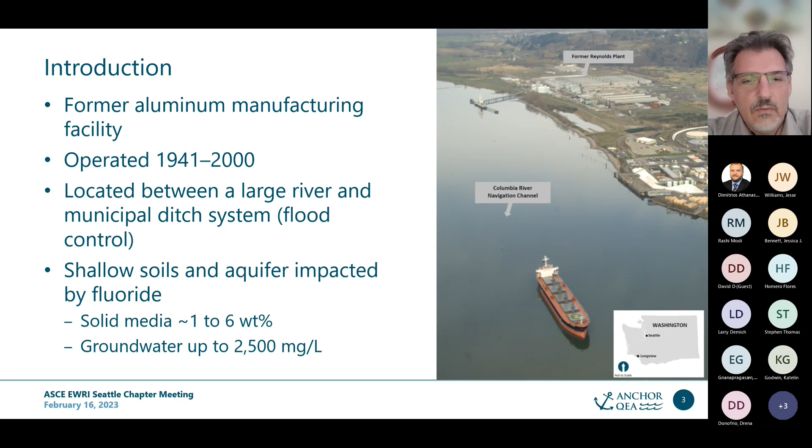Just for reference, the maximum contaminant level for drinking water, which is often what applies for groundwater cleanup, is 4 milligrams per liter. So that's a few orders of magnitude above that. How did the fluoride get there? I'll talk a little bit about the aluminum production process and why fluoride is such an important component of it.

One of the processes that was used more widely was called the Hall-Héroult process, which involves taking aluminum oxide concentrates from the ores and placing them in a carbon-lined pot along with a flux. This flux was typically cryolite, which is a sodium aluminum fluoride, and then applying current so that everything gets really hot and the aluminum oxide starts to melt. The flux reduces its melting temperature, which was really important to keep the process more energy efficient and cost efficient.

Because it's in contact with carbon, a reduced component, the aluminum oxide components actually become reduced to aluminum metal, and that's how they would make the molten aluminum metal. It would be poured off and shaped and so forth. The cryolite was a key component of the process.

Because cryolite is not really available naturally, it's not a widespread common mineral, it's relatively rare. One of the things they did was try to recover the spent cryolite from the actual pot liners, the carbon liners. They would crush up these carbon liners once they were no longer usable and try to leach out these fluoride salts and reprecipitate them so they could be reused. A lot of the process residuals, which still had some residual fluoride in them, were managed on site in landfills. So we have these sources of fluoride on site.

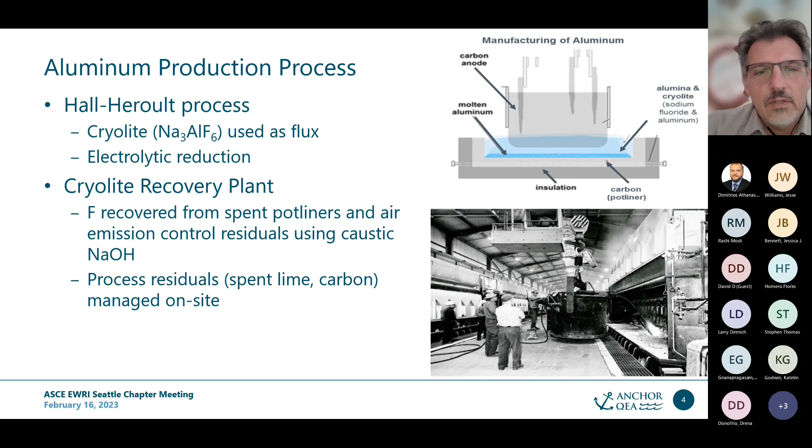Just to give you a picture of where the stuff ended up being located, you can see here... I don't know if, can you see my mouse on the screen? Yes, we can. Okay, perfect. So this is the part of the site.

So here's where all the facilities were and the lines, the pot lines, essentially. This area here in blue is where the cryolite recovery took place. And then these two landfills were where some of the residuals would be stored. There's some other places where, after 60 or so years of operation, you run out of space, you start looking for other places to put some of the stuff.

There are some materials here that also contained other residues and debris as well. And then from the early portion of the operation of the site, there was a RCRA facility. It was closed as a RCRA facility. This was a landfill from prior to cryolite recycling or recovery. And so this was material that probably contained higher concentrations, but it's not marked here because you can't sample this because it's essentially a closed landfill. But the soil surrounding it, you can see all green, means that they're below the screening levels for fluoride.

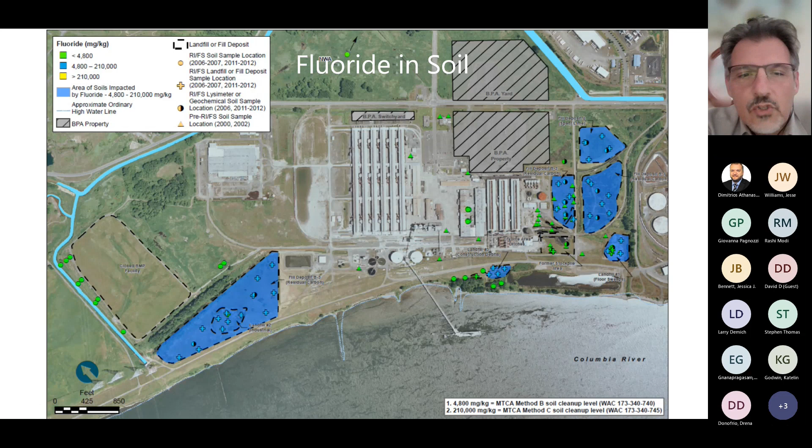So we identified the potential source areas for groundwater impacts. And looking at groundwater flow directions, you'll see this better probably on the next slide, but essentially the site is surrounded by a system of ditches that are maintained at a level below the Columbia River in order to prevent flooding. It's on the river floodplain, and so you don't want a facility that was operating high voltage processes to have the risk of flooding. That could be disastrous. And so that's been there forever, and it actually is a very strong control on groundwater flow directions at the site.

And so on the west portion of the site here, where this closed RCRA facility and other landfills are, groundwater generally flows from the river towards the ditches and tends to take an arcuate path in this direction. On the eastern side of the site, where the recovery processes took place, from the uplands part of the site, groundwater flows towards the ditches again, but there is a divide here. There's actually a dike that runs along the river's edge, another kind of flood protection measure that was installed. So a portion of the groundwater flows towards the river, but most of it beneath the historical operations flows towards the ditch up inland.

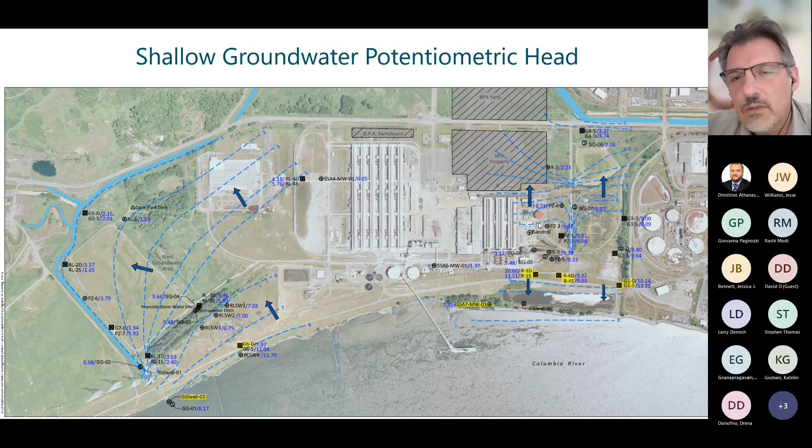What we see is that, after 60 years or so of this operation and an additional 20 years of monitoring, there aren't really any well-developed plumes that extend far beyond the boundaries of the waste, which was an initial suggestion that there may be some natural processes that limit the transport of fluoride in groundwater. And so that was something that we thought was going to be very important to assess.

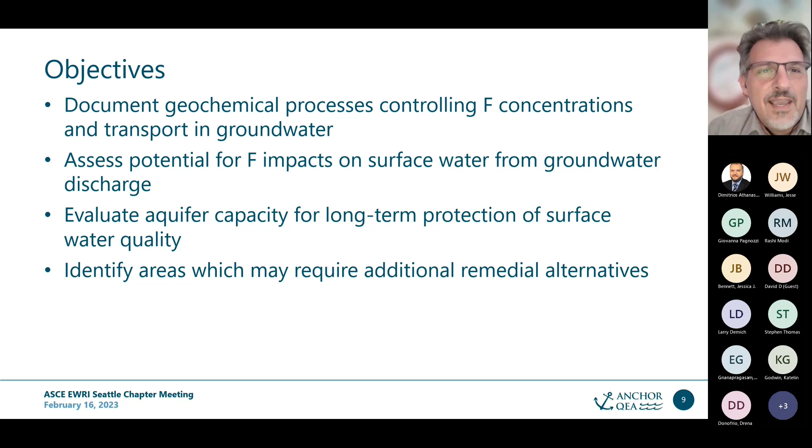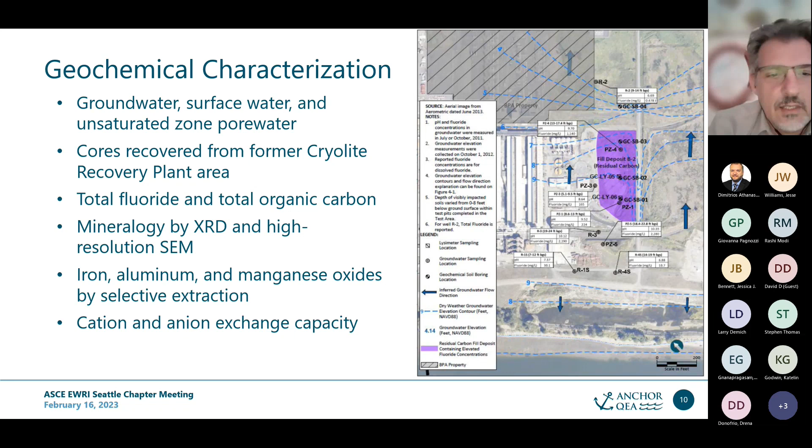So in terms of the geochemical characterization, we focused on that area and the cryolite recycling portion of the site, collected soil borings, and characterized groundwater, surface water, and pore water in the unsaturated zone. We analyzed total concentrations of fluoride and organic carbon to map out where residues were present versus where soil was present, and identified the minerals in both of those types of materials using X-ray diffraction, high-resolution electron microscopy, as well as various chemical extractions that target different amorphous phases that wouldn't be obvious by X-ray diffraction, just to understand what was there, as well as understanding the cation and anion exchange capacity.

The soils themselves contain primarily quartz and calcium-rich feldspars, calcic plagioclase, and some montmorillonite clays. And we did find albite, which is kind of unusual in this setting here, where we're getting minerals that weather out of the Cascades volcanics. Albite's not particularly common, but it tells us something about the processes that may be going on. I'll talk to you about that in a minute.

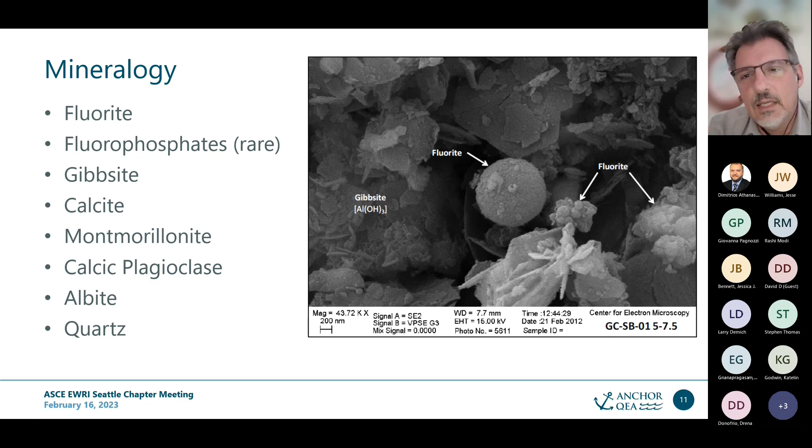But the important thing here is this kind of texture that we see here, the spherical fluorite, suggests that it precipitated in place. It's something that precipitated out of water in situ in these soils. And to try to understand what drives that kind of precipitation, the graph on the left shows dissolved fluoride concentrations in groundwater and unsaturated zone waters, just different color codes there. But what we've plotted on top of that is the red line, which is the calculated solubility of fluorite, the mineral, in equilibrium with calcite, which was also found to be present in many of these soils.

And it shows that reaction seems to define the upper limit of fluoride concentrations across a wide range of pH at the site. It's higher at high pH and lower at low pH. That was an important constraint on fluoride fate and transport, and it's supported by the fact that we do find fluorite in the soils. And the other part of fluorite is calcium. So we know where the fluoride came from. Where does the calcium come from? As I mentioned, the soils in this area contain calcium-rich feldspars and calcium-rich clays because of the weathering of Cascade volcanic rocks that have come down and deposited on the banks of the river.

If we look at a correlation here of exchangeable calcium versus exchangeable sodium, remember sodium hydroxide was used to recover the fluoride in the cryolite recovery process. And in groundwater, high fluoride tends to go with high sodium. In soils, we see kind of a reverse here. We don't expect to have very high sodium in the soils because they're calcic rich naturally. But when we see that, we also see a depletion of the calcium, and that suggests an ion exchange reaction, either on clays or feldspars or both, but that the soil itself is providing the calcium that reacts with the fluoride to precipitate calcium fluoride and limit the movement of fluoride in groundwater. So that was a major process that needs to be considered in terms of fate and transport.

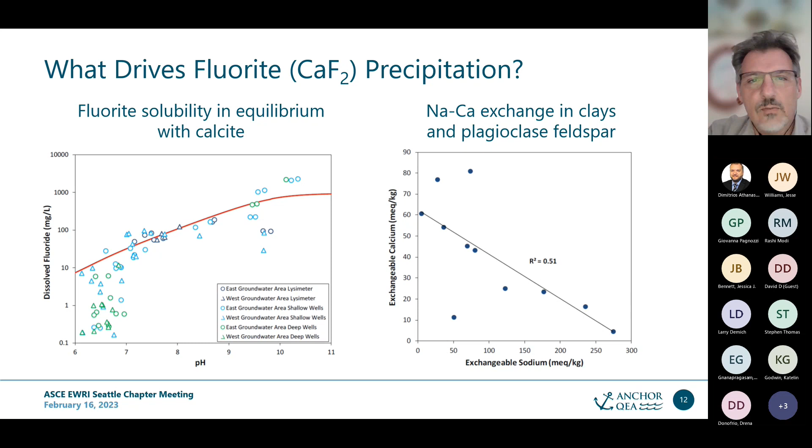There's also evidence for ion exchange on the clay minerals, as I showed you in that electron microscope image. So exchangeable fluoride on the soils. This is an anion exchange extraction, or cation exchange extraction in the case of sodium. There's a pretty good correlation with the amount of exchangeable sodium, which had to have come from releases from the cryolite recovery area, where you had sodium and fluoride in the solutions that were in contact with the residues. So this correlation suggests that fluoride was also being taken up by clay minerals and such.

And when we look at the relationship between the exchangeable fluoride concentration and the total fluoride concentration in these soils, we see that there's a pretty good correlation at low total fluoride, where likely most of the fluoride has been taken up by ion exchange sites.

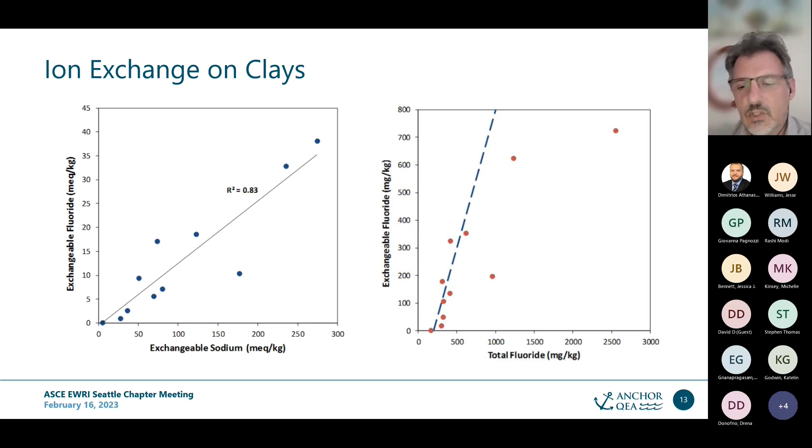But once you get above a certain level, above about 700 or 800 ppm total fluoride, it deviates from that line, suggesting that this is where these other minerals like fluorite and a few others that I'll mention in a minute actually are where the fluoride ends up in the solid phase. So a couple of different mechanisms: precipitation and sorption by clays and other sites.

Another detail here is that because of the high pH in some of these areas, a lot of phosphorus is leached out of the soils. So you can see here, phosphorus versus pH in groundwater. And that phosphorus can be available to react with calcium and fluoride to precipitate various other minerals that we did find. They were rare, but we did find them in the soil mineralogy. These include things like fluorapatite or carbonate fluorapatite, or a very unusual phase of calcium monofluorophosphate. And so that's another secondary precipitation reaction that would affect the fate of fluoride.

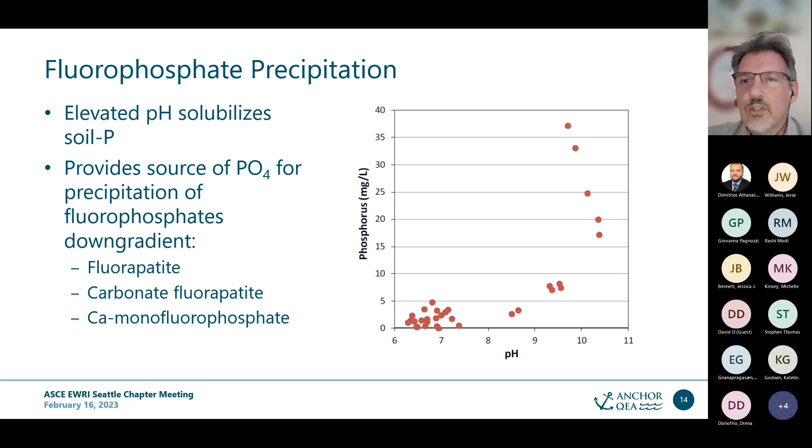Now, in terms of how fluoride got into the groundwater to begin with, in these process residue deposits that are present either in the cryolite recovery area or in those landfills, we do find that there are fragments of fluorite such as this that don't look like they precipitated, but rather look like they were part of the original material and are actually dissolving to provide fluoride to groundwater. However, you have up to 7% total fluoride in some of these deposits, but the amount of leaching is significantly less. So the partition coefficient is quite high, and the leachability is relatively low.

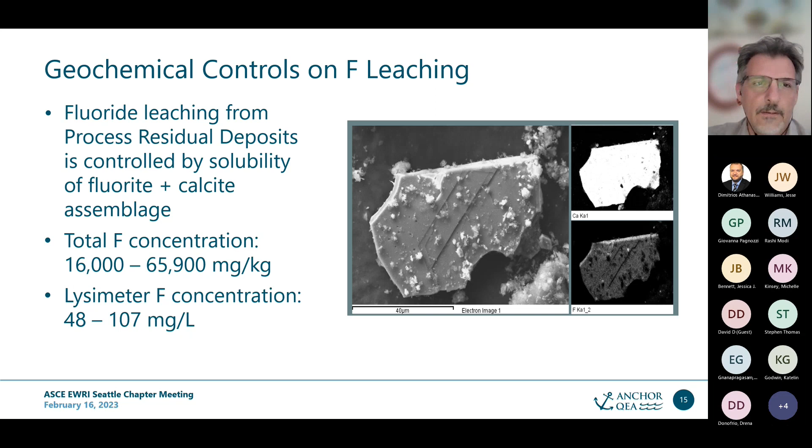So again, just to summarize, we found evidence for a precipitation of mineral phases such as calcium fluoride, whereby the matrix actually provides the calcium. And so if you think about these plumes, they're surrounded by these calcium-rich soils. That explains why the fluoride hasn't moved very far outside of the footprint of the waste materials, as well as adsorption, which is probably more important for regulating fluoride at lower concentrations, as I mentioned.

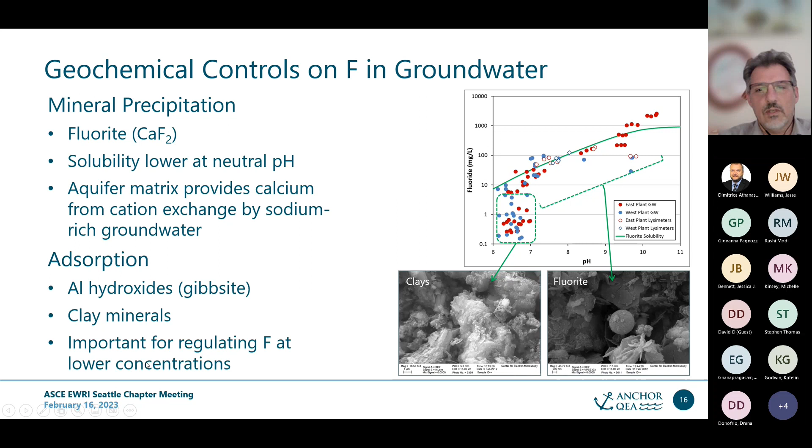I won't spend too much time on this, but essentially this is just a cartoon that says that along the groundwater flow path, those processes I just described happen, and natural attenuation limits how far a fluoride plume can develop, and is important in protecting surface water quality.

And so switching from this, the second phase of this was as part of the feasibility study. So this was remedial investigation so far. The feasibility study involved trying to understand to what extent can we rely on this, and are there areas where we might need to do something more active than just rely on natural attenuation. And this involved developing a groundwater flow model, because the conclusion was that, given that these mineral phases are present in the saturated zone, there's no simple way to reduce the fluoride concentrations in groundwater. Pump and treat would not reduce the concentrations for a very long time. As long as those solids are present, the solubility of fluoride is controlled, and you can't get really below that.

Pump and treat, for example, would be a really inefficient way to dissolve them away, to remove them. Excavation was also not considered feasible for a large part of the site just because of the depths at which some of these secondary minerals, precipitates, were present. And so we wanted to look at, well, how much can we rely on natural attenuation processes?

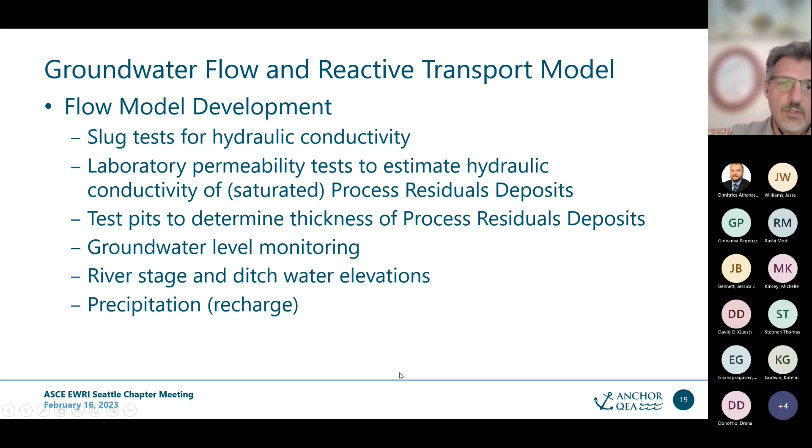And first we developed a groundwater flow model for the site with various types of hydrologic, geologic data, and so forth. And this is just to show you the model domain. It's fairly well defined in terms of groundwater flow because you have these boundary conditions, the river on one side, and then these ditches, which are level controlled on the other. And then different recharge areas where there's bare ground versus paved ground and so forth.

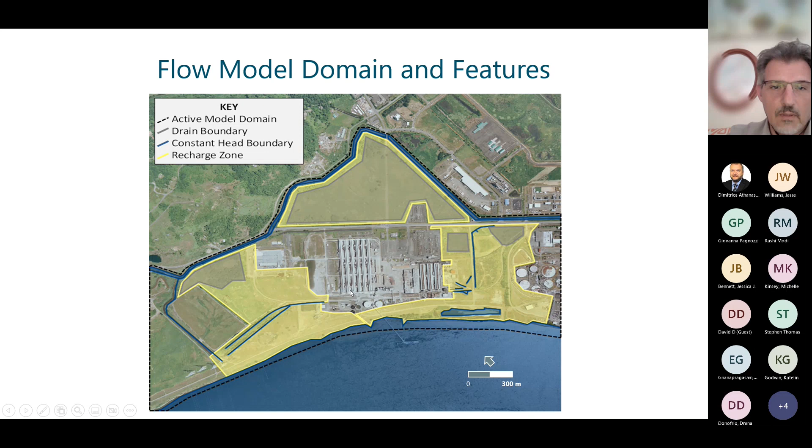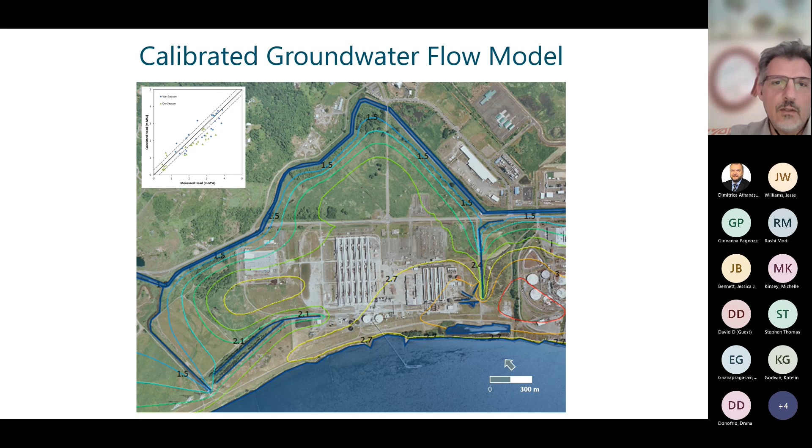But we were able to fairly nicely calibrate a groundwater flow model for both the dry season and wet season separately. And you get these kind of patterns which largely mimic what we were able to measure. Pretty good coefficient of determination on the measured versus modeled heads, and we used that as the basis for a more detailed reactive transport model for this east side of the site where the strong sources of fluoride were present, the high pHs and so forth. That model incorporated all the reactive processes that I described earlier.

It was set up in a software called PHAST, a USGS reactive transport code that simulates groundwater flow and geochemical reactions, which allowed us to incorporate all those processes. The first step in setting up such a model is to get the right initial condition for present day.

How we did that is we did what's called a spin up to produce the spatial distribution of the fluoride associated with each of those source areas. And then that's our starting condition for predictive simulations.

Then we switched to doing long-term predictive simulations to look at the effectiveness of monitored natural attenuation in regulating fluoride transport in the future, and also to compare the effectiveness of potential remedial improvements, such as capping of the residuals areas, to see whether there's a long-term benefit to doing that.

Before jumping there, here's the outline of the model domain for the reactive transport. It's smaller than the flow model domain because it takes longer to run those models, and honestly we didn't need to have the entire domain set up as a reactive transport model in this case. The image is going to be rotated 90 degrees here.

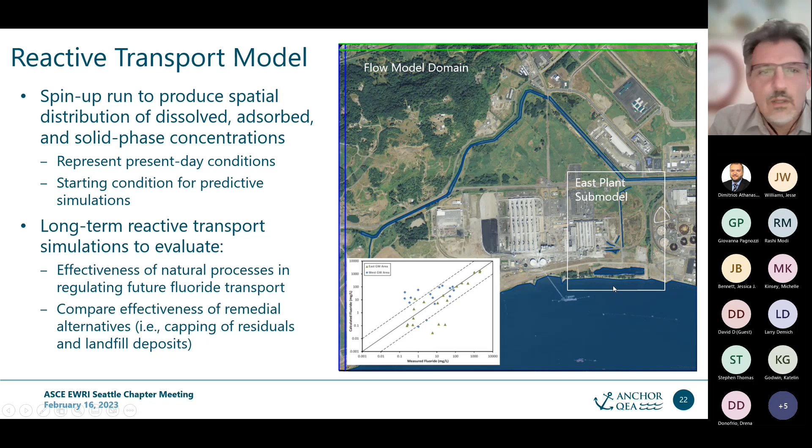The river is down here on this image; the river is over here on the left in this image, and these are just results, so this is flipping through some of them. For the initial conditions, the color coding is for fluoride concentrations in that shallow aquifer, and this is time zero, essentially present day. As I said, the model was run for a couple thousand years.

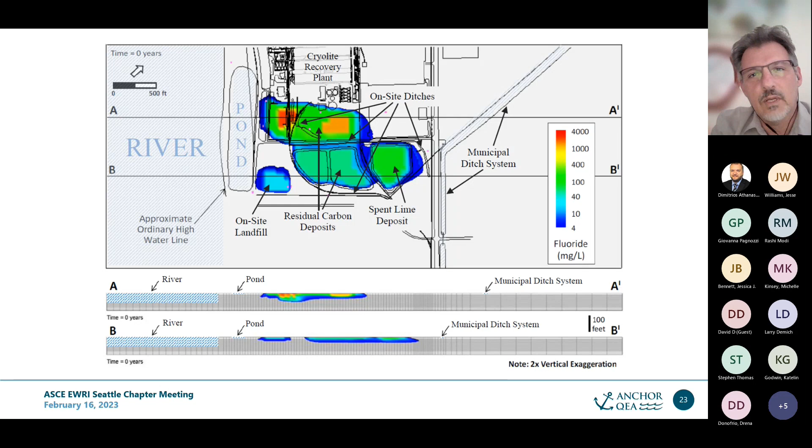What you see is there's no extension of the plume towards this ditch over here. The groundwater is flowing from this area towards the ditch, but you don't see a significant plume developing.

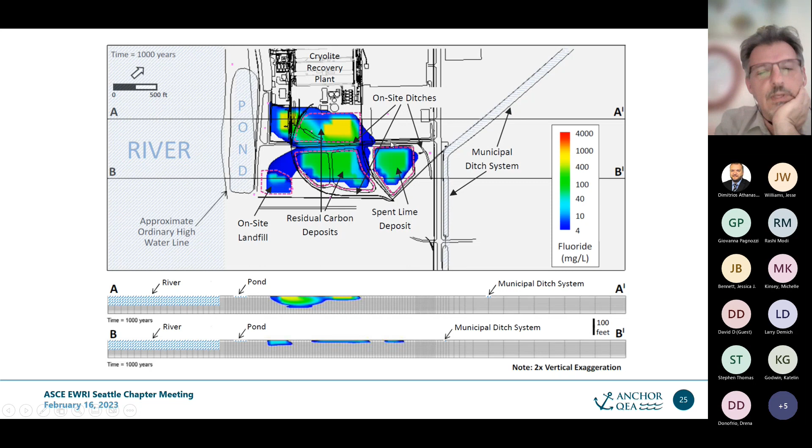Just to show that a little differently, here's an animation of that model. The river is down here, I'll run this again since it goes a little fast, and the ditch is over here. Groundwater is flowing from these areas towards the ditch, as well as from the riverward side of the dike towards the river. You can see there's a little bit of migration towards the river, but it actually peters out.

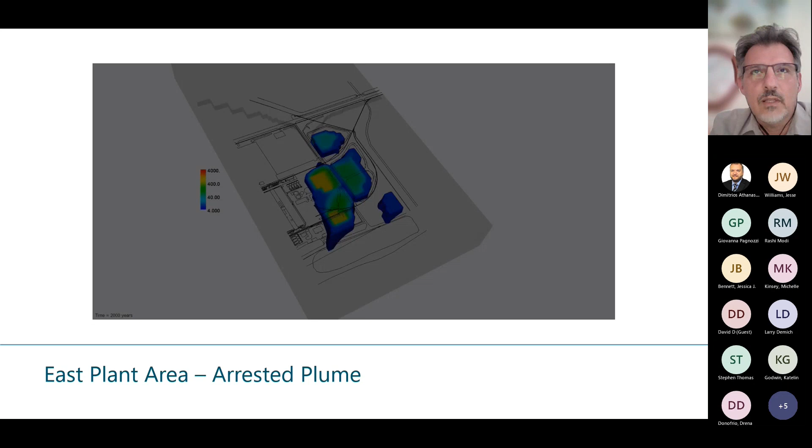The threshold blue color is at the MCL, so everything greater than the MCL is inside that colored block. This shows that there's long-term, significant protectiveness provided by the soil chemistry in limiting where the fluoride ends up.

Now I'm going to switch to talking about what happens on the other side over here, where the ditch is very close to this closed landfill, where we expect significant fluoride in groundwater to this day. The landfill is capped, so it's no longer a source to groundwater, but there's a residual plume that will flush out, and has actually been flushing out for several decades.

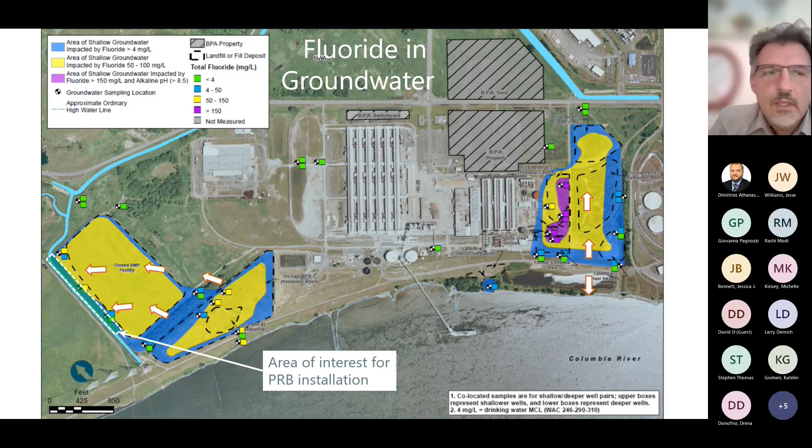In order to improve the water quality in the ditch, we needed to consider some sort of intervention here. What we ended up settling on was a reactive barrier that would remove fluoride. That involved treatability studies, and currently we're wrapping up the remedial design. Construction is scheduled to start site-wide this year, but the PRB is probably not until next year.

Our treatability study began with evaluating a wide range of potential reactive amendments for fluoride removal. We assessed their performance based on removal efficiency, reaction rates, capacity, as well as long-term stability.

This shows the types of materials we considered — about 15 different media. Some were mineral-based, like calcite. Some were mineral-based but biogenic minerals, like bone meal or bone char. Rock phosphate and siderite are minerals as well. And then a couple were just chemicals that have been either used in water treatment or considered for their high fluoride uptake capacity.

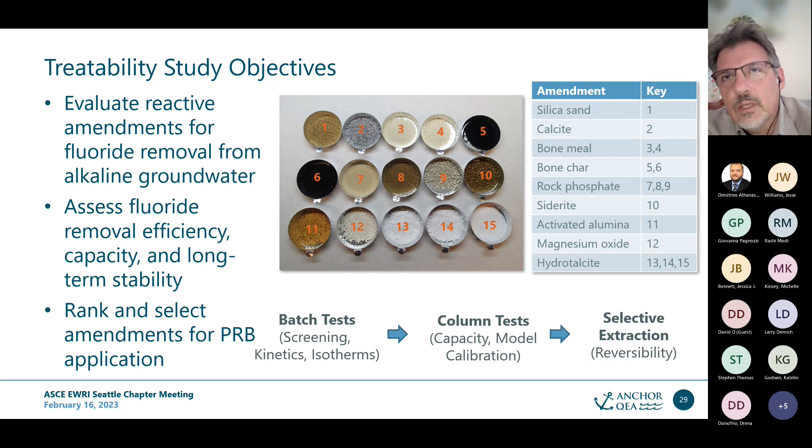This was done through a series of laboratory tests — batch tests, followed by column tests to determine capacity — and then also selective extractions on the column media to determine the stability of the treatment, in order to identify the best choice.

Here's an initial screening batch test of all of those media, both alone and in some combinations, to see if there was any improvement. At the end of the day, there were 4 media that really showed the best fluoride removal.

We tested 2 different groundwaters: a typical groundwater with about 80 parts per million fluoride from the west side of the site, but also, because there may be higher concentrations present beneath that landfill, we collected groundwater from that hot zone on the east side of the site with a higher pH. That would be sort of an extreme.

In general, the 4 media that performed best were the same for both groundwaters. They included these biogenic phosphates, bone meal and bone char, activated alumina, which is a well-known fluoride treatment chemical, and hydrotalcite, a magnesium aluminum carbonate mineral that has also been identified for its high capacity for fluoride uptake.

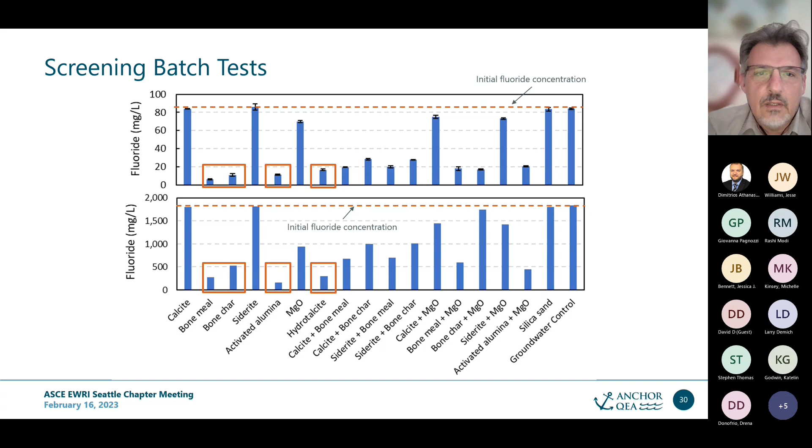We also looked at kinetics in some of these phases to understand the timescales for treatment, because that's important for designing a reactive barrier. We wanted something relatively fast. Again, those four materials seemed to have relatively rapid fluoride removal rates. Within about 8 days, we had reached what looked like equilibrium for most of these.

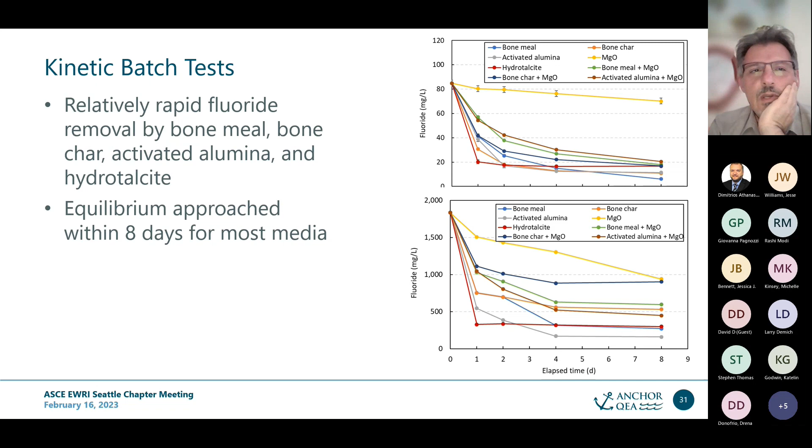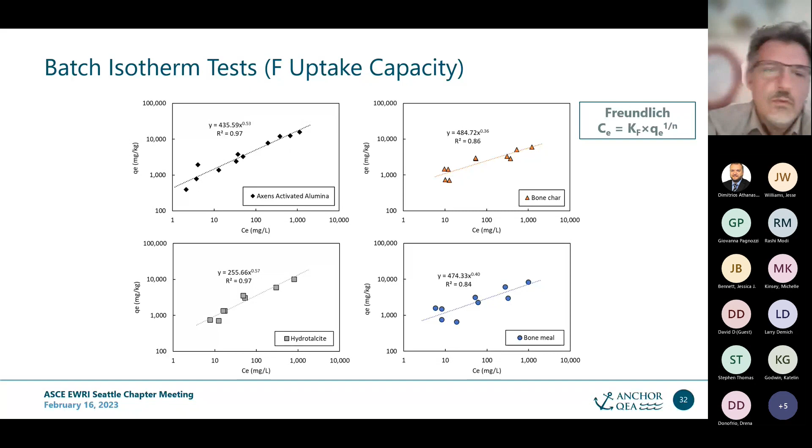The next step was to understand the capacity of these materials for fluoride uptake. We did batch isotherm tests for all of these, including activated alumina, bone char, bone meal, and hydrotalcite, and were able to fit those to a Freundlich isotherm for each to get these types of numbers. The activated alumina, bone char, and bone meal had the greatest adsorption isotherms.

I'd say the hydrotalcite was a bit lower, and given that it's also more expensive, that one was dropped from the list in terms of ranking. As you can see here, the bone char and bone meal had slightly better isotherm constants than the activated alumina.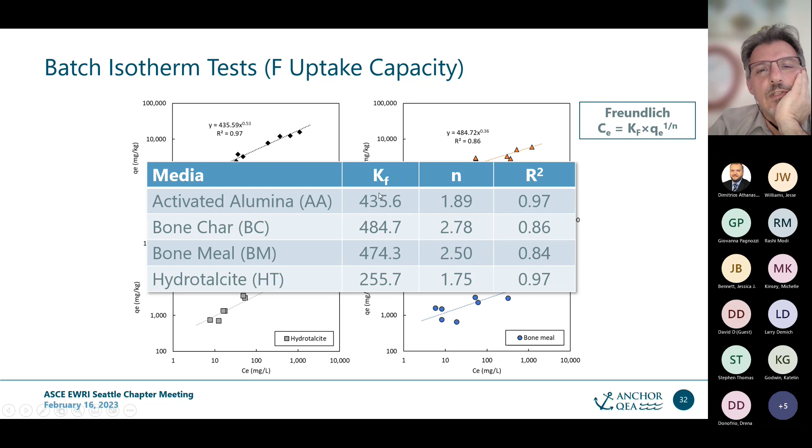But one of the downsides of those materials is that they have a lot of phosphate in them - they're calcium phosphates - and they tend to leach some of that phosphate out. That was a concern for discharge to surface water, that it would impair the water body.

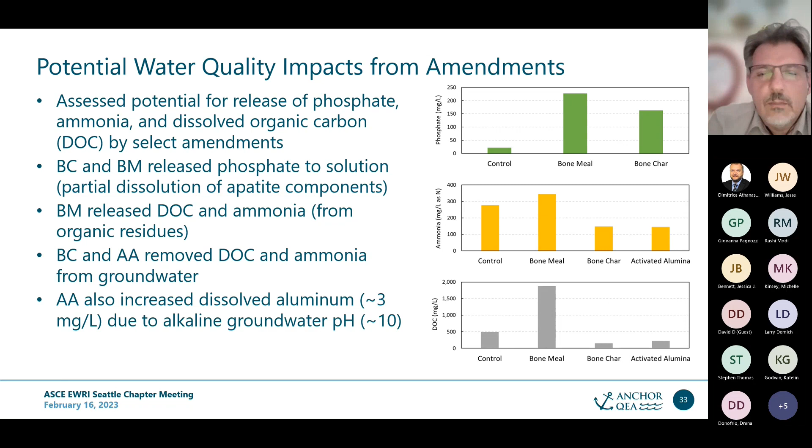At the end of the day, there were a number of these secondary water quality impacts that were evaluated, and activated alumina was the best choice given all the criteria we were looking at. Here's how they got ranked in terms of fluoride removal, relative costs, and water quality impacts.

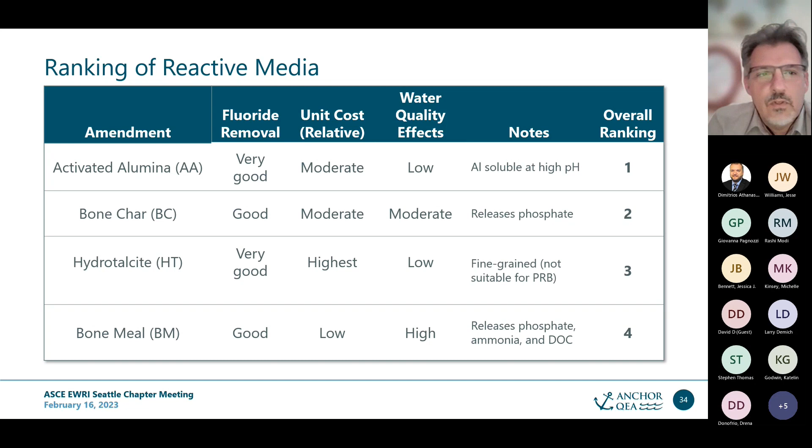So activated alumina and bone char were the top two that moved forward to column testing. There we wanted to look at the capacity of the media on an equal basis so we could evaluate the cost benefit of one versus the other.

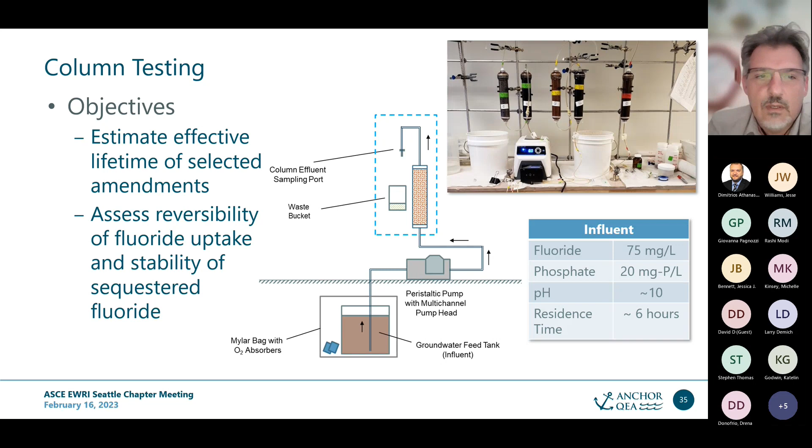Here are the results of these column tests. The activated alumina had the longest duration to break through, slightly longer than bone char, but as expected it was a little better. The difference in cost of the materials would have to be factored in, but that changed over the last couple of years as market conditions changed, specifically with regards to transporting the material to the site. I'll talk about that in a second.

To counteract this issue of the bone char releasing phosphate, this shows phosphate release from the bone char column versus the influent phosphate, shown as gray open circles. There is phosphate in that groundwater, but there was more when it was in contact with the bone char. When we combined the bone char with the activated alumina, it actually removed all the phosphate from the groundwater for an extended period of time.

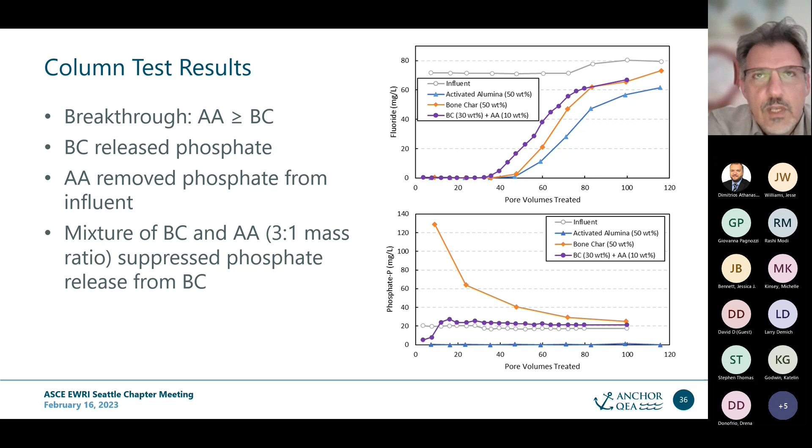But when we combined a little bit of activated alumina with the bone char to make a mixture, we could actually suppress that release. So again, that's another consideration in looking at what's the optimum reactive media for the reactive barrier.

In terms of stability or fluoride sequestration by these treatment amendments, we saw that they were pretty good. These figures show the total mass accumulated in the column test on the media, and then how much was released at either acidic pH, neutral pH, or basic pH. You can see that pH has an effect on the amount released.

Activated alumina on the whole seemed to do best under acidic conditions, but generally most of the fluoride that was taken up was sequestered. It was not re-released under these fairly extreme conditions, especially the acid and basic extremes.

So we don't expect that the fluoride taken up in the PRB would be easily released. It should be stable there.

In terms of taking these results and designing a reactive barrier, we took the column test data and fit it to a geochemical model, built in PHREEQC, that incorporated the surface complexation reactions on the activated alumina.

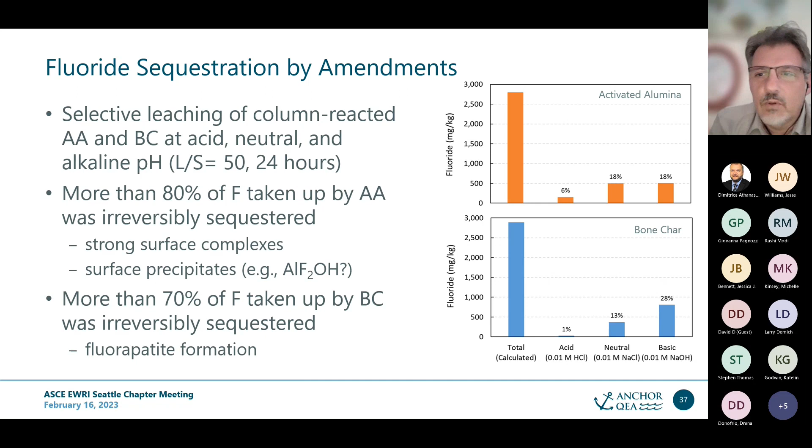As a result of this, we ended up selecting activated alumina as the preferred media. It was a combination of not having the secondary water quality impacts associated with bone char that I mentioned, but also in terms of availability and net cost, it was cheaper and more effective to just build the reactive barrier with activated alumina rather than a mixture of bone char and activated alumina. So that's where we ended up.

So in order to design the dose, we took the column test results. These are the effluent fluoride concentrations for two columns with different dosages of activated alumina. We fit it to a model so we could calibrate some of these reactions, not so much the equilibrium constants, which come from the literature, but the capacity, the binding site density per unit mass of activated alumina.

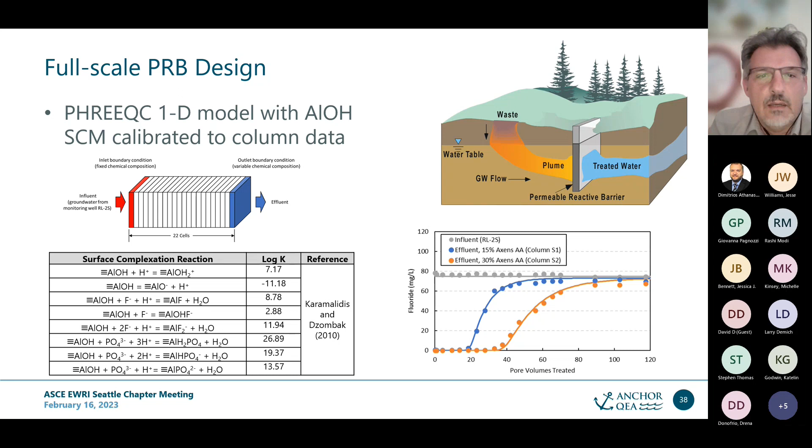When we did that, we also incorporated information from the pre-design investigations. We went and did some direct push borings and collected groundwater profiles for fluoride to see what levels we would be encountering, and the hydraulic conductivity of the soils upgradient of where the PRBs would be, since that controls the flow rate through the reactive barriers, as well as taking into account historical trends in groundwater fluoride concentrations.

This little figure here is log fluoride concentration versus time over the last 30 years or so that this closed landfill has been monitored, and it shows that over time there has been a decreasing trend as the residual groundwater plume flushes out from beneath that landfill.

We can take that into account as well in determining how long this reactive barrier actually needs to be operating, based on what we know about these conditions and what we can extrapolate into the future. Using this information with the model, we looked at the impact of different dosages of activated alumina, and our threshold was not 4 ppm, which is the MCL, but 1.8 ppm.

We arrived at that number because, as part of the cleanup action plan at the site, there's a screening level in surface water. If we detect levels above 1.8 milligrams per liter fluoride in surface water, that triggers some bioassays and so forth, and potentially other investigations to see what's going on—is the reactive barrier running out of capacity for treatment, or is something else going on?

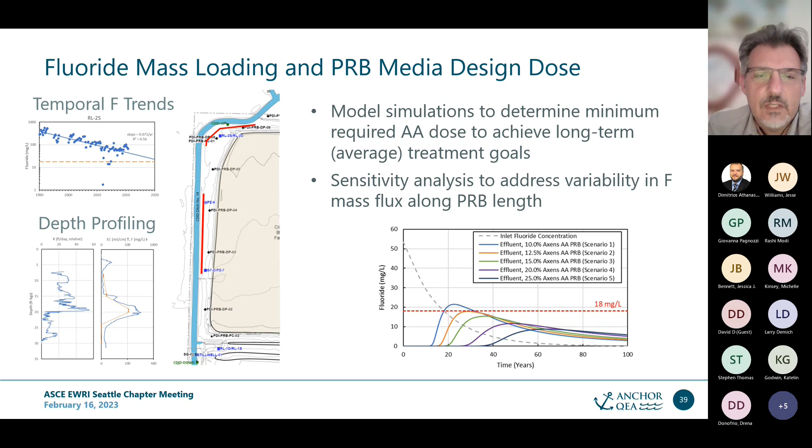The final dosage is a little bit higher than that in order to account for safety factors and so forth—it's closer to 20%. That was based on some extensive sensitivity analyses with the model to make sure we would minimize the chances for any kind of exceedance triggering additional actions in the ditch.

So in summary, our treatability work and remedial design work so far identified activated alumina and bone char as effective reactive media for reactive barriers designed to remove fluoride from groundwater. It also identified that the bone char, although interesting in and of itself, is a byproduct of meat production—beef production specifically.

Does release some phosphate, which may be a concern depending on site conditions. However, that could be addressed by developing a mix of activated alumina and bone char, which was one of the things we considered. But given the market conditions and current supplies of bone char in the quantities needed for a reactive barrier, it would have to come either from Brazil or Mexico. Just the transport costs alone made it less appealing than using activated alumina directly. So that's how we ended up with the activated alumina reactive barriers.

We used the model to develop the dosages that account for both future conditions as well as sensitivity analysis on variability along the length of the reactive barriers, which are several hundred feet long in total. As I said, the EDR, the engineering design report, is currently in the final revision stage, and we are hoping to be in construction within the next year or two.

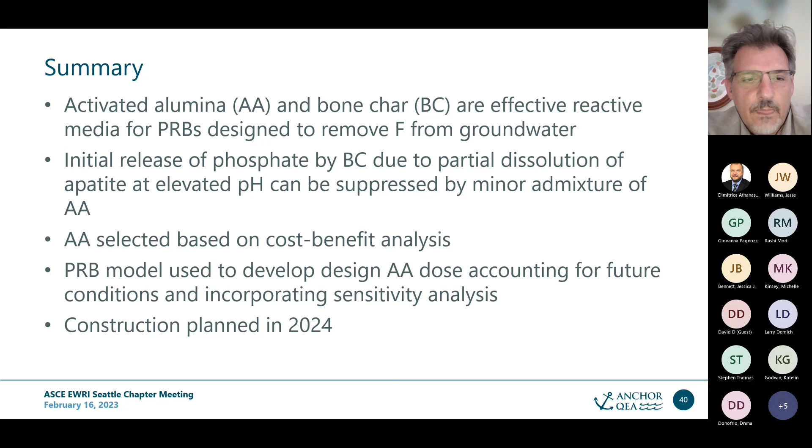With that, I will be happy to take any questions or discussions. Thank you for your attention.

Thank you very much, Dimitri, for your presentation. Excellent presentation. I mean, who wouldn't be happy if you had all the steps in there: doing the site investigation, the modeling, and the treatability study in the end.

Yeah, I guess it just worked out that way. This was one of the first projects I worked on when I joined Anchor in 2010, and it has just progressed through those various phases. It was always a geochemical question in terms of the groundwater treatment. So I somehow got myself involved and have not been able to get extricated from it, let's just say.

I see, that's a good thing. Does anybody have any questions for Dimitri? Sure, I have a quick question. Dimitri, when you set up the initial reactive model, did you take into account any kinetics for fluoride, or was it more equilibrium based?

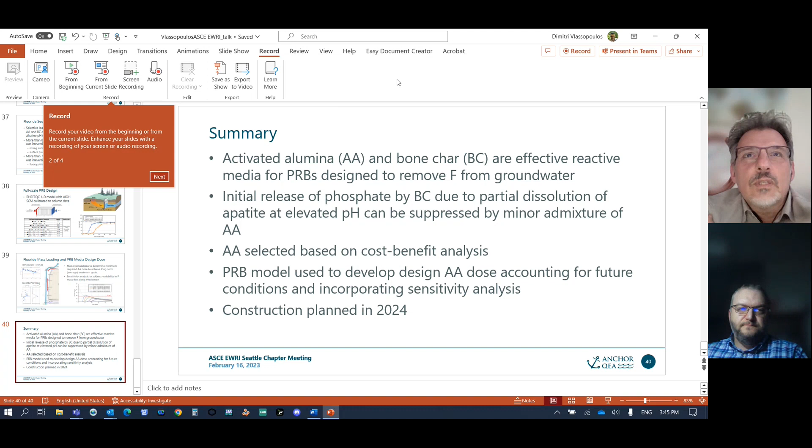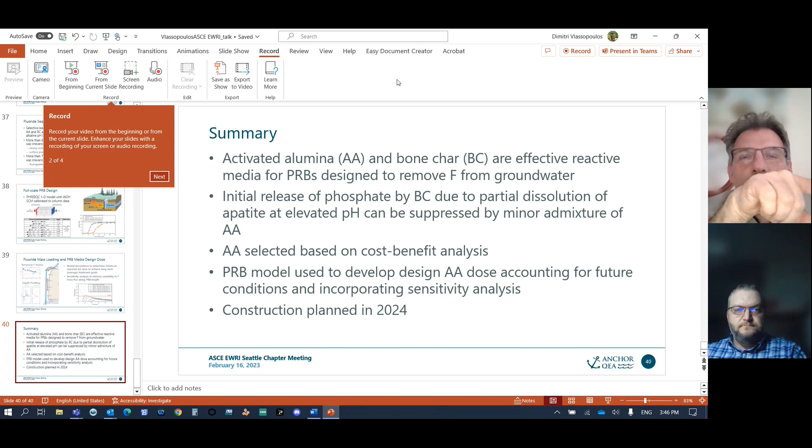But when we then upscaled it to do the field design, the groundwater flow or residence times within the PRB were on the order of many months, so the kinetics were not so important. It sped up the execution of the model to just ignore them at the end. We did evaluate to what extent that would affect the results, and it was not significant. So it really depends on what you're trying to model. To get the right parameters for a field scale model from lab studies, you might need to do something a little more detailed, accounting for kinetics and things like that. But in this particular case, the upscaled model could be done much more simply once we had the calibration.

Very cool. Thanks. Some great thoughts there. Indeed. Anybody else have a question for Dimitri?

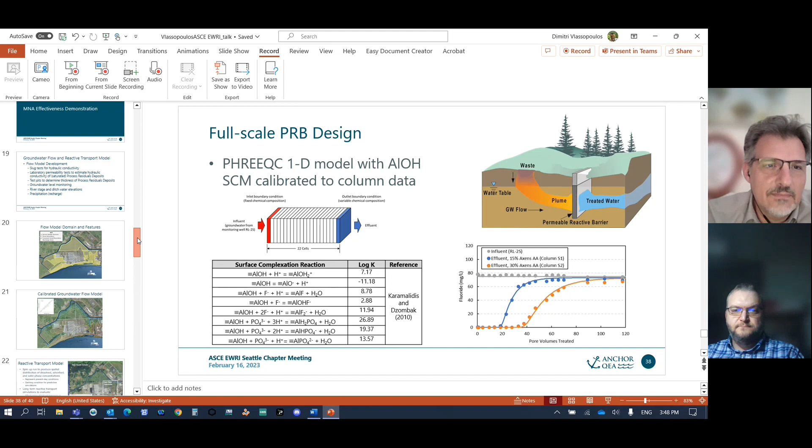Hi, Dimitri. Thank you for a great presentation. It was really interesting. I'm a PE, but I don't do anything like this, so it was fascinating to me. But I'm wondering, since we have a little bit of time, and if nobody else has any important questions, the slide that had the cartoon on it, as you called it, I was wondering if you could go back to that.

Sure, let's just show it. Just you went by it really quick, so I didn't really get to take a look at it. If you could just give me a quick summary on it. Absolutely, yeah. Thanks, let me get rid of this thing here. It's because I was repeating basically what was on this cartoon, so a little ahead of myself.

So this is where some of these residual materials would be landfilled, for example, on the site. There may be an existing cover, or that would be part of the remedy, to cover up uncovered materials. But it starts with precipitation on these materials that contain residual fluoride, and we had characterized it in the form of a calcium fluoride mineral phase.

And we had leaching data from lysimeters, so we could characterize the source term that goes into the groundwater. Once it gets into groundwater, the fluoride is transported along groundwater flow paths, and it comes into contact with soils that have exchangeable or reactive calcium, either in the form of exchangeable calcium in clays, or calcium associated with soil minerals like feldspars, which are quite abundant.

This material is also rich in sodium, as I mentioned, and that drives a reaction where the sodium pushes the exchangeable calcium out of the solid phases and into the groundwater, where it then reacts with fluoride to precipitate those calcium fluoride crystals that I showed you. That has really limited the lateral movement of fluoride, so you don't really have long plumes developing down gradient of these deposits.